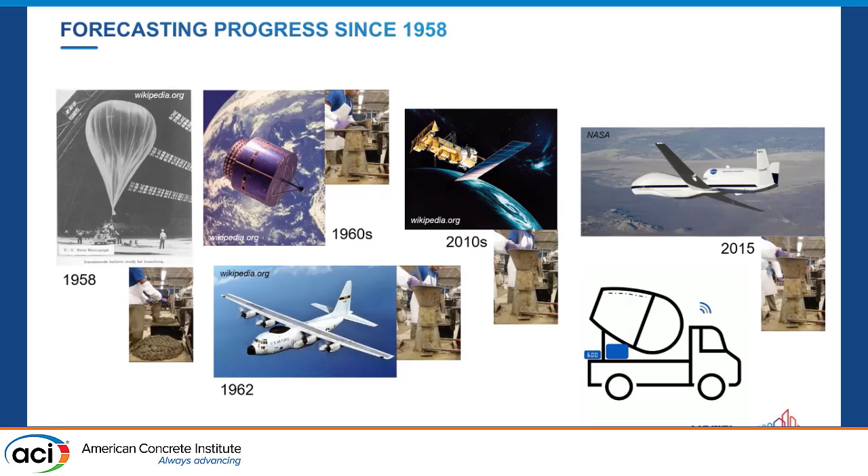And so, again, back to Pierre's talk and what we'll be talking about here, it's incorporating these sensors to really give you a much better idea, and a much more frequent idea of what's going on in your concrete truck as you move along.

All right, so different from Pierre's system, which is an internal probe, we measure the hydraulic pressure used to turn that drum. And using that, you can come up with a correlation with the slump, very much similar to what Pierre does there. The addition that we have on the system is the ability to automatically add admixture and water. So it's tied directly to a control system that adds water and admixture based on your slump sensor.

So if your slump is dropping, let's say by ½ an inch, you can pump a little bit of admixture in there to bring it back up, or water. And all of that is recorded. Right? We can record all that information, and whether you add water first, admix first, or whatever, that's all up to the producer. They have complete control of that.

As you can see, there's a lot of sensors on here. There's processors on here. So there's a lot of technology that obviously has to be robust. I would definitely say the concrete industry is one of the harshest places for any electronics. We found that over the last decade. But once you get something on there that works, it can be really powerful.

And I do want to say these systems are not lab prototypes. These have been out there for quite some time. So the system that I'll be talking about today, we've put over 185 million cubic yards commercially, right? So that's about 1,000 Superdomes if you go visit that in New Orleans.

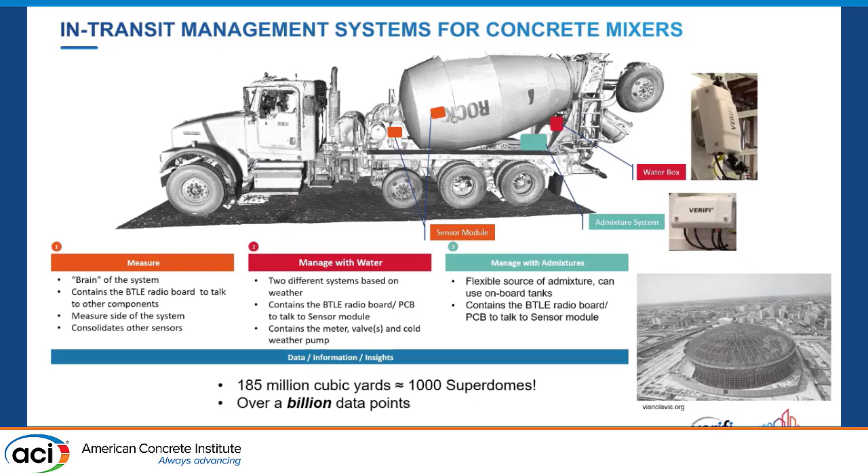The best part about this is that with each one of those deliveries, you're measuring slump, temperature, revolutions, drum speed, location, all of this information every 30 seconds, every 10 seconds. Over the trucks that we have, that's over 1 billion data points, right? 1 billion data points to take a look at how that correlates to human behavior, which is really interesting.

So you take all this information, and it basically gets put up into the cloud. This is the hydraulic pressure sensors and the drum sensors. You can kind of get an idea. You can see when water is added, for example. You can see when the drum speed changes, etc.

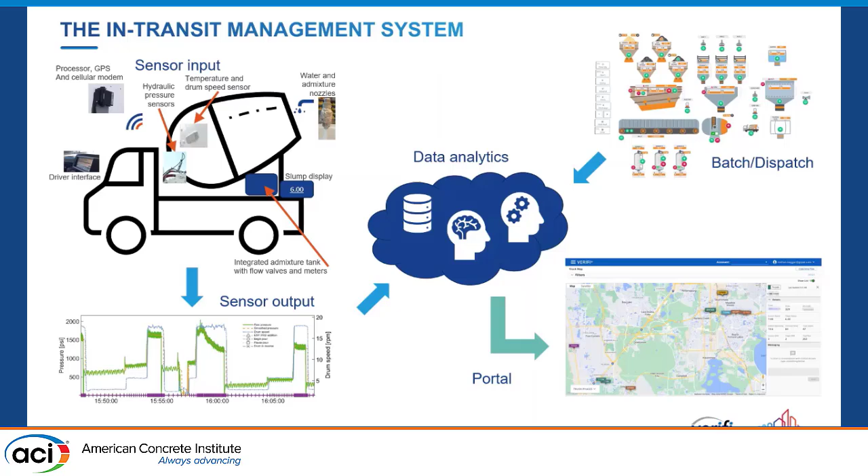So we get inputs from the batch dispatch, and then you can display this all for the ready mix producer and contractor on portals, right? So that they can start to look at their operations and see how they can improve what they have there. So just as a quick example, it's been adopted for the HS2 project, so this is the largest infrastructure project in Europe.

And basically the ask for this was that they wanted to test every single truck of concrete for slump and strength. So that takes a lot of manpower to do. Over 3 million cubic yards for this one contractor. That's what they were responsible for. And essentially, they could not hire enough people to do all of that quality control. So they were looking for a sensor system to give that to them.

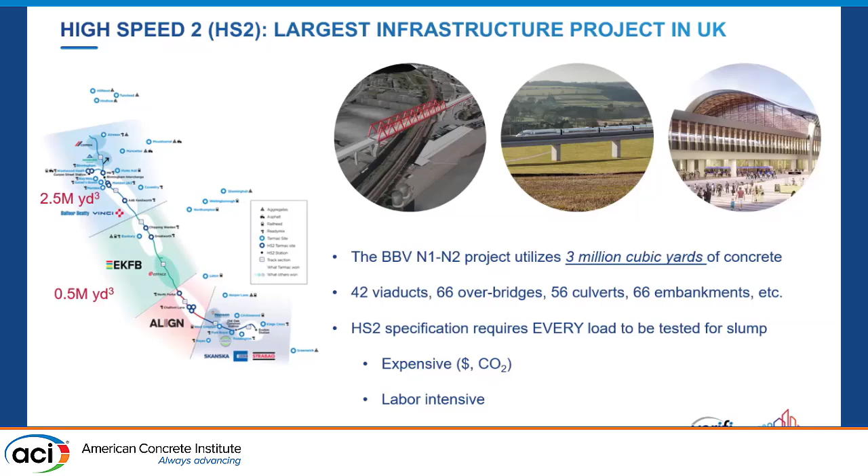And so they've chosen this sensor system that we'll talk about today. And so they're able to have slump measurements, not just for every delivery, but every 30 seconds in that whole delivery. And that helps them to be accountable to the government. This just gives you an idea of accuracy for these things. So after calibration, anything dark green is 95% when you compare it with an ASTM test.

This is the amount of testing that they've done just to qualify this. So it's up to 16,000 slumps. And you can see the accuracy runs very high. As they get new mix designs, sometimes they try to sneak new ones in there that we don't know about. We actually have a system that automatically learns over time. So the first couple aren't going to be good, but over time it's going to get you back up to that 95%. So this is currently being used as their standard way of measuring slump. So they don't need technicians to do that anymore.

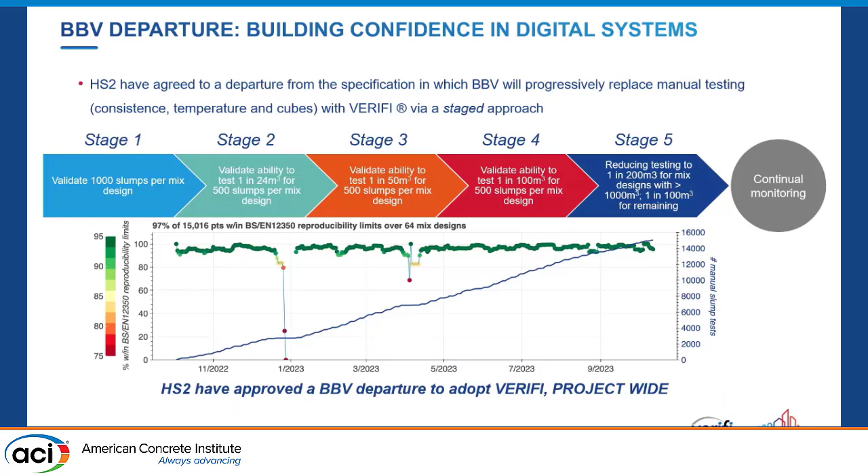All right, so as I said earlier on, one of the great things about this is that we're able to tie into adding water or admixture. So one of these nozzles is for water, the other is for admixture, and it's dependent on that slump measurement. So for example, over time, this is the slump measurement. The gray is the target, the green is the actual.

So we've first added some water to bring it up to 100 millimeter slump here. After the slump starts to decrease, we say switch over to admix. It starts adding admix until it gets up to its target. By the time it gets to the site, you're on target, you're ready to pour. And again, you can do this in any order that you want. This is all up to the producer, and you can record all of this stuff. So it's simply a closed loop system, right?

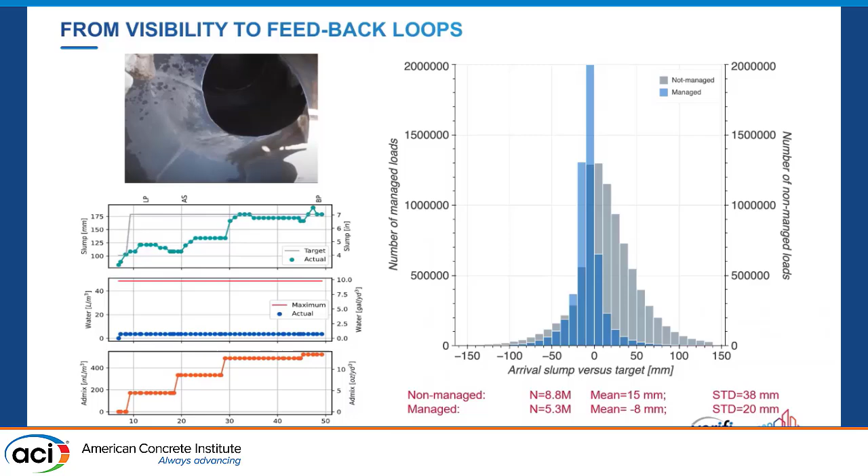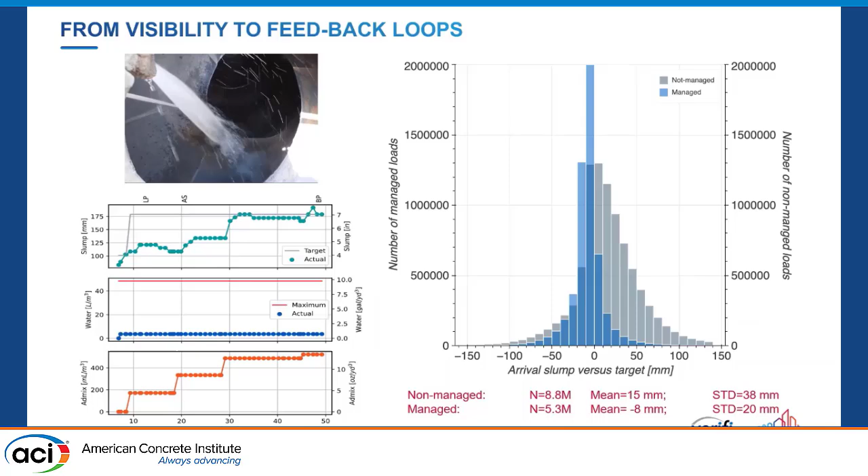And this is a surprise a lot of times to the producers themselves because you never had this data, right? You never measured every slump. You never had the measurement over time. So this has been really great for the producer to understand where their variability lies and then gives them a tool to help make that better.

All right. So the purpose of this talk really is to say, okay, if we've improved the slump, either through control of water, better use of water, better use of admixtures, how does that relate to our strength? Okay, and as you all know, when we design our concrete, we basically are designing for a specified concrete, but obviously if your average strength was your specified, 50% of your deliveries are going to be under strength. Right? And so there's what's called a required compressive strength.

You're basically shifting your distribution so that you only allow a certain amount of tests that are going to be under the limit. Right? Whether it's 1 out of 100 or whatever. But that's how you do it. And basically the amount of overdesign, as we would say, is dependent on how wide your distribution is. All right, so if you're really wide, you really need to design for a much higher strength to ensure that you're not failing as much. And so this just illustrates that.

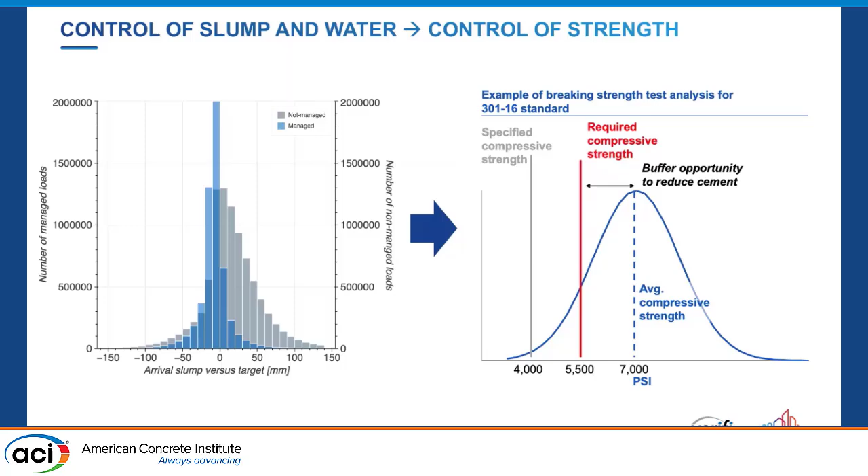So again, if we're tightening up the distribution on the left, are we tightening up the distribution on the right? All right, and I'll give a short way of seeing how we can look at that.

All right. So before I get into that, we just saw the distribution of your strengths. So what this plot basically shows is that each one of these boxes here, each one of these columns here, is a different mix design. We basically took the histogram, and it's kind of like we're looking at it from above. So this is your average for this one. The box is plus minus 1 standard deviation. And then the darker the color, the more data points that were in there.

And sometimes the reason why I do that is that, for example, you have this mix here. You have a strong concentration of data here, but the average is here. So this might point to maybe there are 2 different labs, right? Maybe there are 2 different plants. So it kind of gives you a little bit more granularity on that.

Aside from the data that's in these boxes, what I have also plotted is the specified strength. In this case, all of these are 4,000 PSI mixes. And then through ACI, you can calculate that required strength, which is this black line here. So if you have a great mix, your average is going to be right on the line. Your unnecessary over-design is very minimal here.

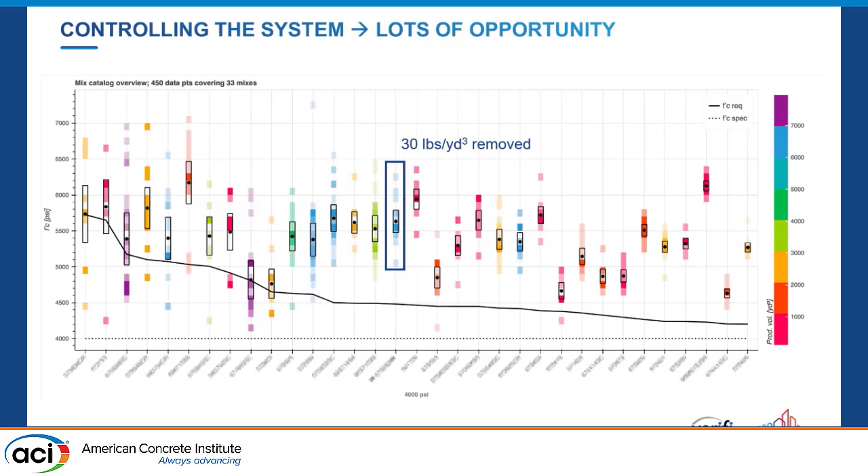So now what I want to do is take a step back. We worked with a producer and have been able to look at strength since 2014, and this includes time before the system was installed. And so what we've done is calculate the theoretical strength over-design. So if I looked at this strength difference, this one right here is about 1,000 PSI. So that would show up as 1,000 PSI over here. So that's how we generate that graph.

And so we're doing this year by year. The blue shaded area is when they turned on water management. And you can see that over time, they're starting to look at their mixes, realize the standard deviation has come down, their over-design has gone up because of that, and they can start taking out cement.

So this is all a certain specified strength. So this is not one mix design. But as they go through their development, they'll either make new mixes or edit the ones that they currently have, and they'll start to pull out cement until it looks like it's stabilizing a little bit. So this is pretty interesting. This is one single mix design example.

And so you can see that getting your standard deviation down on your slump and water can help them be more confident about taking some of the cement out. And again, this is one tool, as Joe said, as Pierre said. I'm not going to sit here and say this is the only reason for the cement that's coming out, but it's a way for them to be comfortable or feel less risky and be able to pull some of this out.

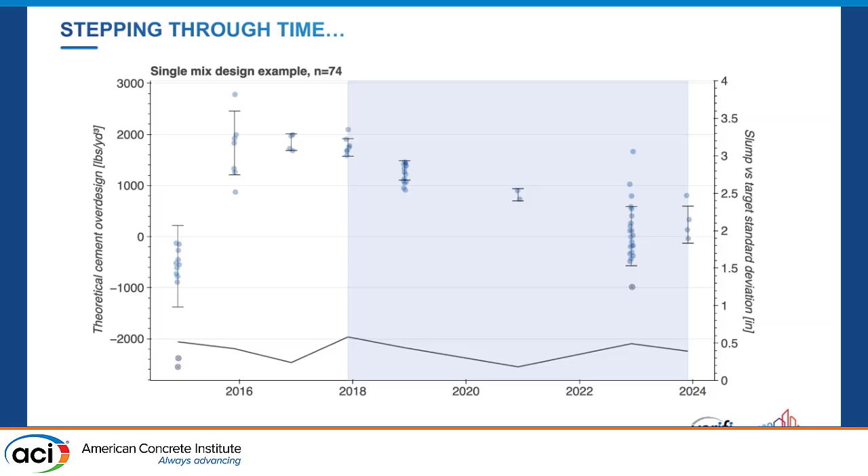All right, so now if we go and basically take all of the mix designs, so this is one mix design, if we take all of their mix designs within a certain, like a 4,500 PSI, we'll get this plot, all right? Different colors are different mix designs, so you can see that there's just a lot of data here. What this line is, basically, is the percent of the mixes here that were managed, right? So before they had the system, nothing was managed with water.

They took about a year to start getting into this process, which is not just a flip of the switch, right? You need to change behavior. You need to get people comfortable with this. And so it took some time, and you can see that they're almost managing all of their mixes now with this water. And because of all the data here, this is kind of torturing all the information, right? Pull out what you want to hear. But over time, both the spread of the data and it ends up pointing lower.

And so one way to do this is let's just cut this in half. Let's just make two populations. So we'll just look at before. If there existed a time when they were measuring slump and not managing, we'll look at that, and then the full management part of that. That'll be the next couple slides.

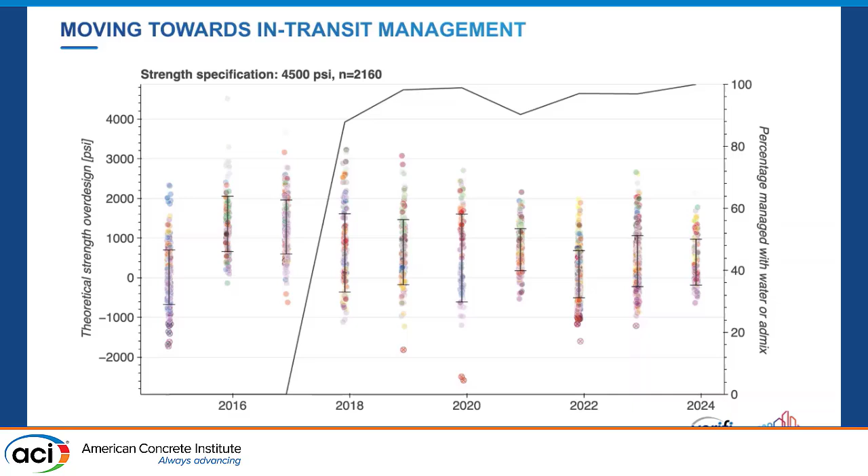So, sorry, I just want to make sure.

Okay, fine. All right, so again, no system, measure only, and then manage with water. So this is slump versus target. So I do want to say, this is all manual slumps, and these are slumps that are collected for the samples that they take strength with. Usually somebody's watching, and they're going to do a pretty good job with that. I wouldn't say it's necessarily representative of everyday behavior, but this measure only, this is from the system itself.

So you can see this increased. I would say some of this is just people getting to learn the system. But also this is always going to give you a pretty true measurement here. You can see with the managed water, the slump versus target basically became half, right? So much tighter consistency around here.

And then basically we do that theoretical strength overdesign. And so you can see that starts to decrease as you move from no system to measuring. And then finally managing with water, you can start to bring that down. Just a couple more slides here. This is also, let's see, the cement content. So how much cement they could start pulling down.

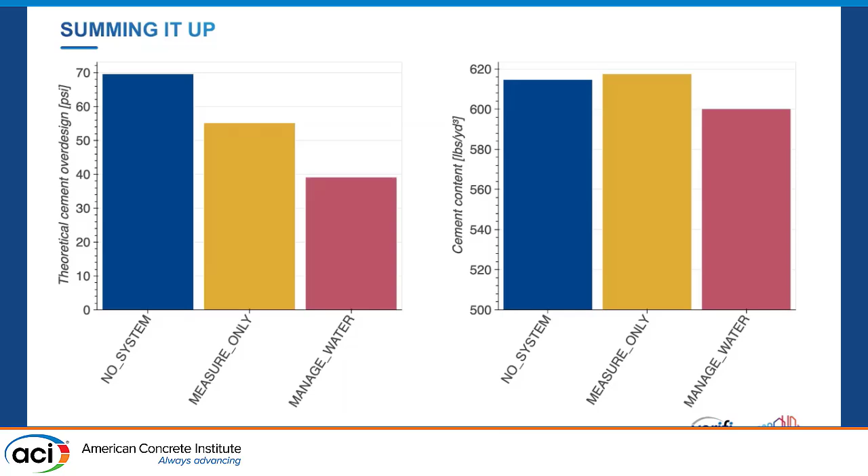All right, and then the last slide here really talks to the percentage of tests that were under the spec strength. So you can see overall this producer does a pretty good job. You're aiming for 1 in 100. A lot of times you'll see producers that don't want any test results coming under, low breaks. And what happens there is that you're really putting in a lot of cement so that you have 0.

You are allowed 1 out of 100 for these tests, so that's kind of the target most of these people should be looking for. Of course, it depends on your mix and your spec and all that kind of stuff. So you can see with the system, measuring starts to come down a little bit, but it's really with managed water in these cases that they're able to get less risk for this, right?

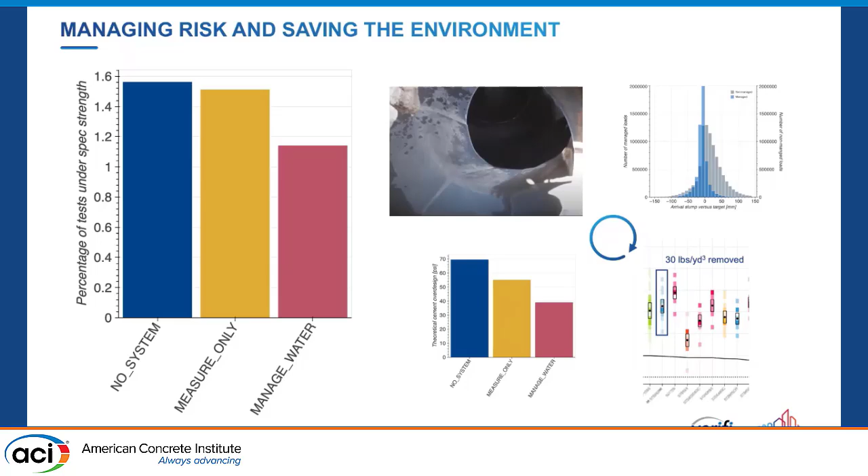So less risk, you have more visibility on your system, and then a lot of times you feel more comfortable taking out the cement knowing that you're going to hit those strength targets because you have a constant pulse on your operations.

Right. So today, this is a short presentation, but we talked about closing the loop with this management and just seeing how tidying up the variability on your water and slump side translates to your strength, and then of course you can start to pull out some of this.

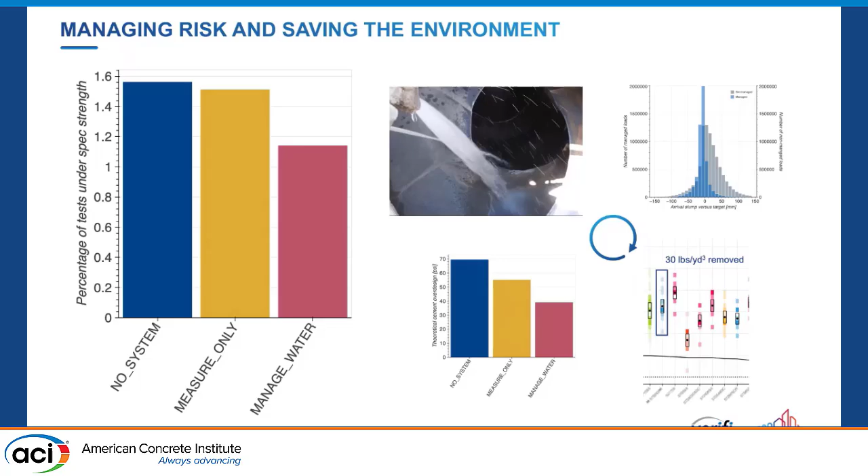All right, and then with that, any questions?